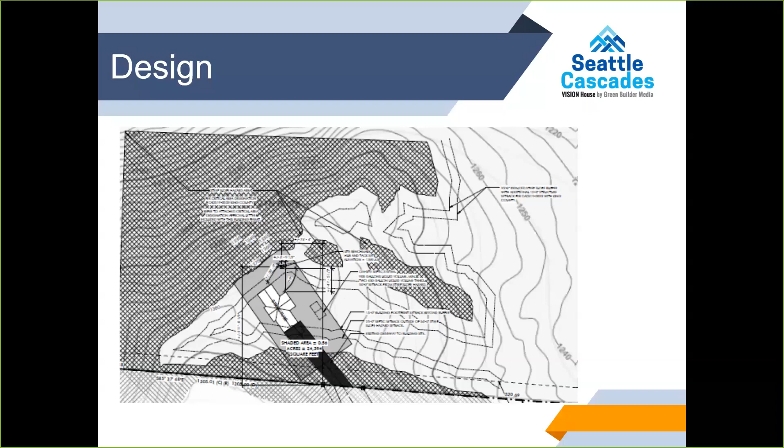Note that we also tried to keep anything downstream like septic and sewer connections simple. It's a septic connection, not a sewer, and it's down, so it's gravity fed. We're trying to keep this as simple as possible, with the least number of pumps and filters possible.

As we started talking about the challenge of the environment we were building in, we noted a few important things. Number one, drilling through all the stone on the property costs a lot of money per lineal foot. It had to be drilled to get water that may be there, and we didn't know how many hundreds of feet we'd need to go down.

We determined that, being site-specific and because we get so much rainwater there, we would have a large cistern that would provide all the potable water. As in any typical project these days, everyone is worried about low utility costs. We don't buy water, we get it from the sky. It's free, except for the pumps to run it and to build it.

Everyone is worried about energy, so we have a very highly insulated envelope with a SIPS roof, structural insulated panels. We have insulated concrete form walls, and insulation underneath all of the at-grade concrete slab, so we have little to no thermal bypass going on, making it a very highly insulated project.

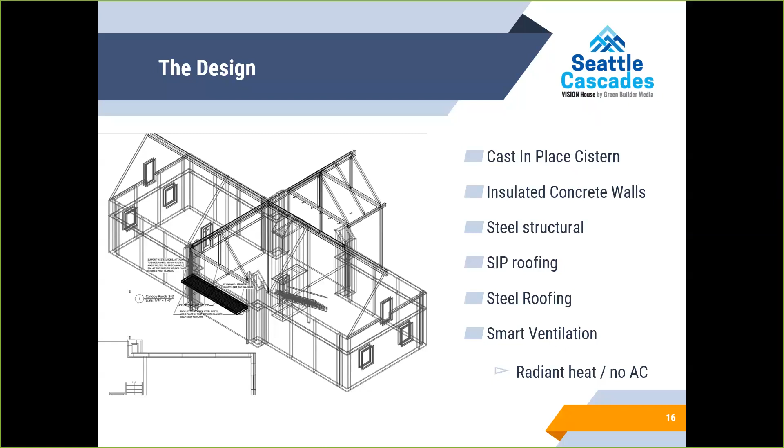And in general, because we're so highly insulated, we have a well-ventilated house, and we'll go into that more in future slides.

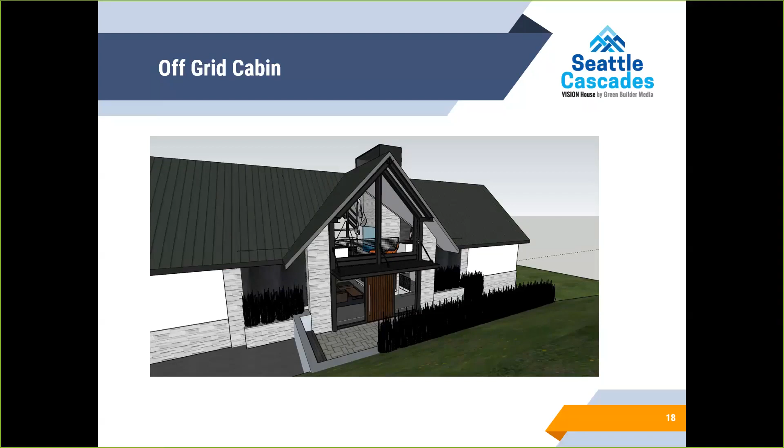So I'm going to describe the floor plans very quickly so we can all get a concept of how this design lays out. At the walk-out basement floor — this is the floor above the basement — in the basement we have a garage, a cistern, and all of our mechanical systems.

You can see from CR's design that he really loves to entertain in the kitchen and dining room area and likes to get big groups of people together. So the kitchen and dining room area doesn't have a whole lot of windows, because it's really about an intimate time to be together, entertain, and enjoy each other.

As we go up to the next level, these rooms are in the gables, so we have very steep pitched roofs in these areas. That's why closets and things of that nature are on the steep pitched side, so that in the middle, the bedroom has a nice high ridge, which allows heat to get away from a person and rise to that ridge line. You can see we basically have two master suites and a big open area in the middle, which we'll get to.

We start designing, as you can see in the earlier images, from simple SketchUp models. We move from those into a 3D design where we can have full conflict resolution for all the systems we're putting into the home, so that there's the least amount of conflicts or challenges during the building process.

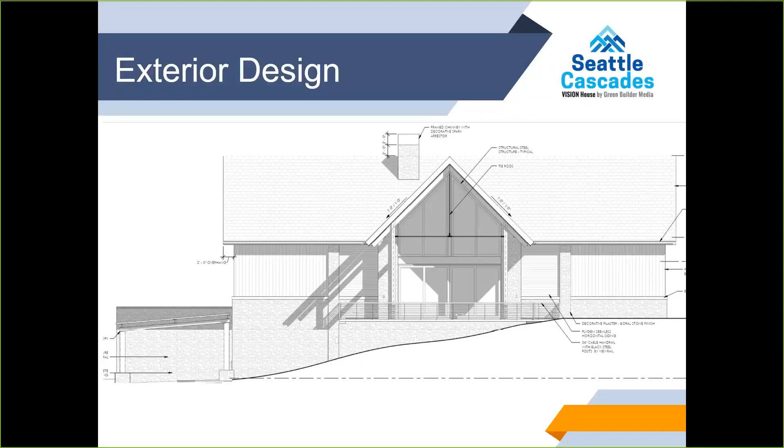This is the back porch, early on in the design. It doesn't show all the topography changes and those things, but you can see a mixture of stone, steel siding, steel roof, and a steel gable end with a lot of glass, capturing that amazing view that CR showed you earlier of his site.

This is as the design is pushing through time. When you saw where we started, here is more where we're ending up. You can see the back porch got a lot bigger and more covered, so there's more use of that indoor-outdoor space.

You can see we're showing some concrete form work. That's the mechanical space, underneath that deck is the actual mechanical space of the house. The grating, the louvered system in the corner of that deck, actually houses an atmospheric generator there, which we'll talk about in the future.

And you can see to the left there's the PV trellis parking area, which provides all the power for the home. Again, simple, modern cabin.

CR just integrated this piece to us recently, and CR loves to barbecue and get people together and hang out, so we decided to put a little dining pavilion a little ways away from the house where he can barbecue. The reason it's a ways away is to keep the barbecue grill smoke from traveling into the house, but being able to go to the side.

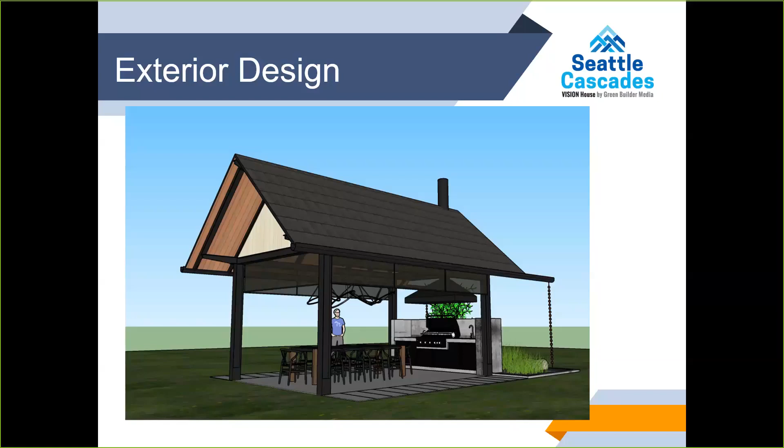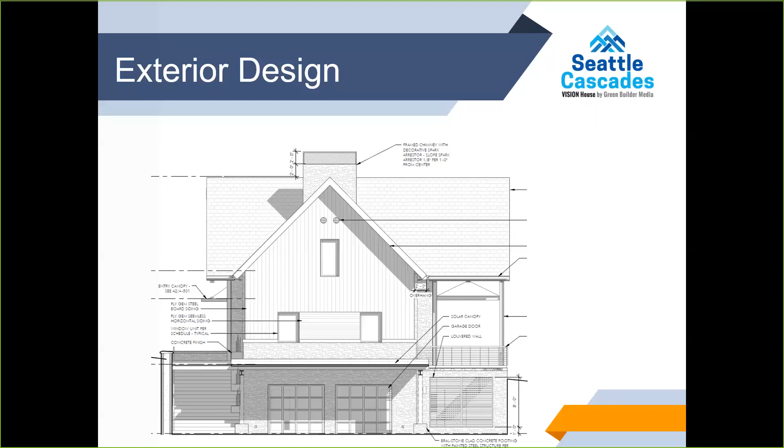You will also notice the floor plan is very rectilinear. Again, we're trying to keep it simple. We're working within the systems and the span of the systems, which is a Hambro flooring system with a concrete deck that really works to maximize the use of that product. And that's how we ended up with a lot of the widths, designs, and proportions of this house—how those systems are being used most efficiently.

Again, just a little original rendering of that same elevation, you know.

I will give Stace the out—one of the only arguments he's lost in this entire design process was me putting a remote laundry system in, which is me being a super pragmatic building scientist. A dryer sucks out so much of your conditioned air when it runs. I really argued to develop a space where I could put the laundry system outside of the conditioned envelope to reduce the negative impact of laundry. It's unconventional, but it's also super convenient, right?

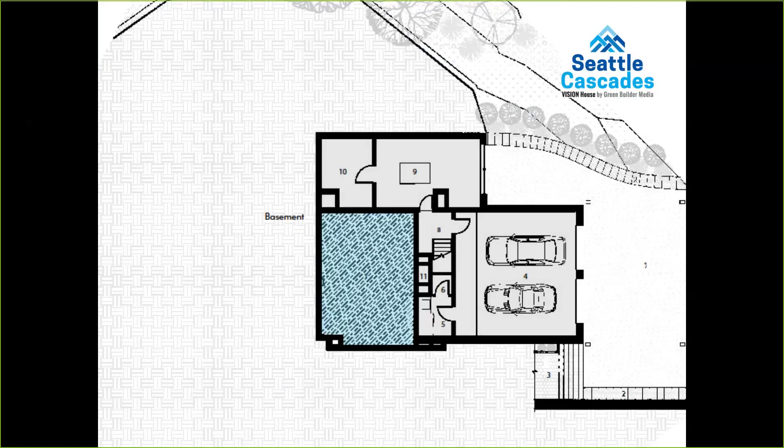So I wanted to tee up Stace a little on the interior as we go to some of the interior renderings, because one of the two design principles that was important to me as the person who's going to live in this home was: what was the home built around? In that climate and the way that I live, I wanted a heart to the house. Almost dead center in this home is this amazing 13-foot wide, 26-foot tall stone monolith with a fireplace set in it, to really act as the center to collect community, the center to start design, and the center of the aesthetics of the home.

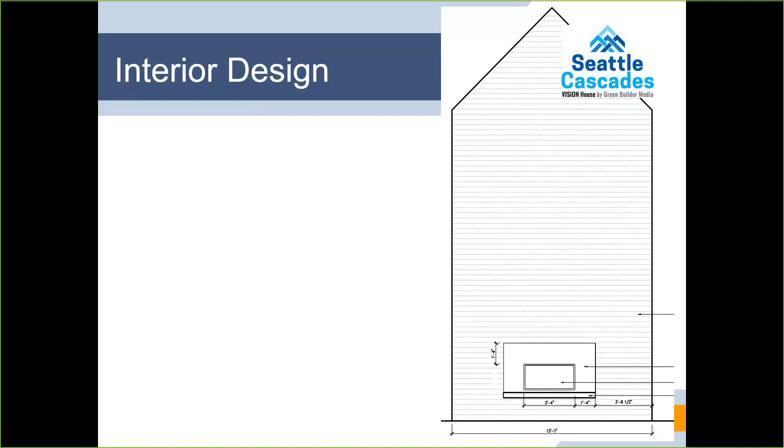And so as you kind of walk through the interior design, this is really based on my strong desire to create this big stone monolith as the centerpiece for the home and the heart of the home.

So as you can see, Stace had walked you through the floor plan, and before we get to the renderings, you can see the thing labeled as number 15 is that fireplace. As you come in, it's the big stone monolith to your right. As you're sitting there, it envelops your views on either side of nature, and it really does provide the center of the home around which all of the traffic swirls and the guests would turn, and the lifestyle of the home is largely based around that.

And the second piece was, whenever I've loved a cabin, I've loved lofts. I've always loved that rustic cabin with a loft up in the apex of the roof. It's just not something that you see in conventional design. But it's a feeling that I really love, that you go upstairs and you get nestled into the attic, and it feels to me warm and secure. And as a scientist, I love the origami of all those roof lines coming together.

It really did, those two factors—the large stone monolith and the master bedroom seated up in the attic—were really kind of the two big asks that I made of Stace as we came in and thought about the way this home was going to live and the way it's going to feel.

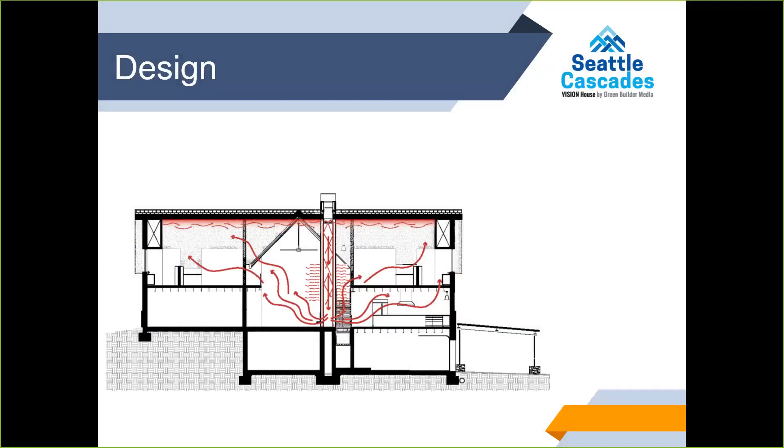Stace had mentioned this a bunch, but I wanted to put my building scientist spin on it. This house sits on top of a 700-foot grade change in basalt, a volcanic, very hard rock, so groundwater may be found somewhere 900 feet below this home by drilling through basalt, and that was financially unfeasible.

But it also afforded us the opportunity to rethink the way we think about what an off-grid zero-energy cabin could look like. Because Seattle gets 90 inches of annual rainfall, we were able to design this house around water capture, and I love the look of steel roofing.

So we reached out and found this new product from Boral, which is a stone-coated steel roofing. Design-wise it's super great. Energy efficiency-wise it acts as a cool roof, but also as a nice surface to collect all the water that hits the roof into downspouts that pre-filter and go into the cistern that's part of the foundation. Doing that, we exceed the water demand by almost 2 times an average family of 4, just from the water that hits that roof.

We should have a tremendous amount of opportunity to provide all the water for this house off that roof. And there's another system that enables us to take humidity out of the air and create distilled water to augment the water demand should it be necessary, with 35,000 gallons of storage capacity to both serve water needs and flex excess energy that could come off these solar panels in mild climates.

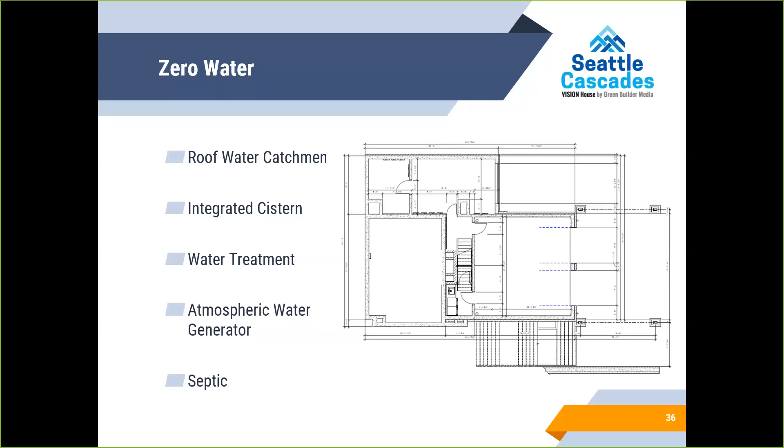The atmospheric generator is a very simple piece of equipment. It costs about $2,500 and works just like a heat pump. It allows CR, when needed, to make about 100 gallons of water a day. So it's a super simple system, easy to maintain, and gives everyone that feeling of security.

I'll take a little bit of this. Stace talked a lot about wanting to use thermal mass to increase comfort and leverage the climate. During the summer it's a very cool 60 degrees on this hill, but it'll heat up to the mid-80s during the day. By using thermal mass, we can ventilate the home, bring that cool air in at night, cool down that large thermal mass, which is the interstitial space of the masonry system in the middle of the house, and use that to maintain very cool temperatures during the day.

Without running an air conditioning system, it's the way homes worked before the invention of air conditioning. These shifts not only provide a new opportunity to reduce energy use and let us be off-grid more effectively, it's one of the largest design elements that's going to start impacting all of us going forward, because this load shift, or what they're now calling grid optimization, literally impacts the cost of producing energy for residential power use by $1 trillion.

There's a tremendous amount of research being done by the US EPA and the US Department of Energy, and policy being created, so we'll see code coming out through the IECC that requires designers and builders to start considering load factors, the way a home consumes energy at peak, and using strategies like thermal mass, ventilation, and controlled fenestration to really think about load management and shifting those peak loads off the utility demand curve.

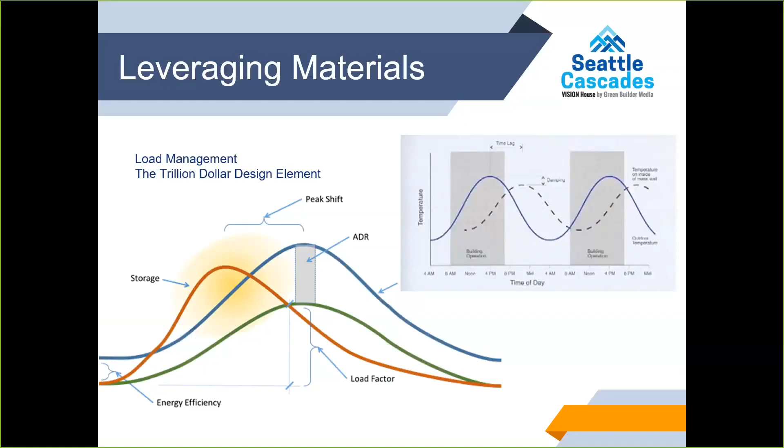As designers, all of us are going to be so involved in this in the future, it's not funny, trying to help all of our local jurisdictions understand how we all play a part in doing this. It's part of us as designers providing information to our owners and clients so they can make educated decisions.

Go ahead, CR. The other piece of not just being really efficient is enabling us to generate a project that demonstrates very smart zero energy. There is actually access to power, but we decided that because of the push to a low carbon energy source, and because of the push for homes to become zero energy in a lot of municipalities, we wanted to have the discipline to not tie into grid power.

And so this entire home is self-sustaining from water, and it's self-sustaining from power. We designed the PV system as an architectural feature, with rain shedding off the front of the garage that acts as a carport, and as an architectural feature to the tuck under garage.

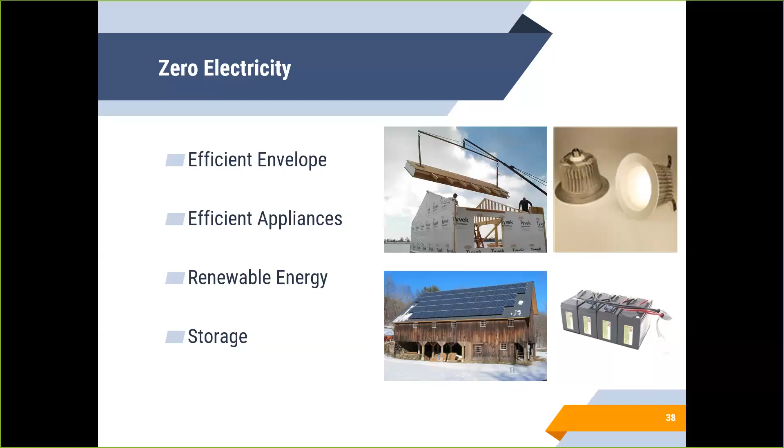But also we wanted to tie that energy in with a good, intelligently designed home. You know that lower left picture of a barn with solar? You can make any home, including a barn, zero energy by not thinking through the details. But by using SIP roofs, high thermal mass insulated concrete forms, efficient appliances, and storage, we can tie the entire home together to have a very low demand, a very flat energy curve, and demonstrate a project appropriate to tie into utilities to provide that load flattening, low demand residential structure in places where they either don't have sufficient roof space to tie into the grid, or they don't want to depend on batteries and want to use the utility to augment their power demands.

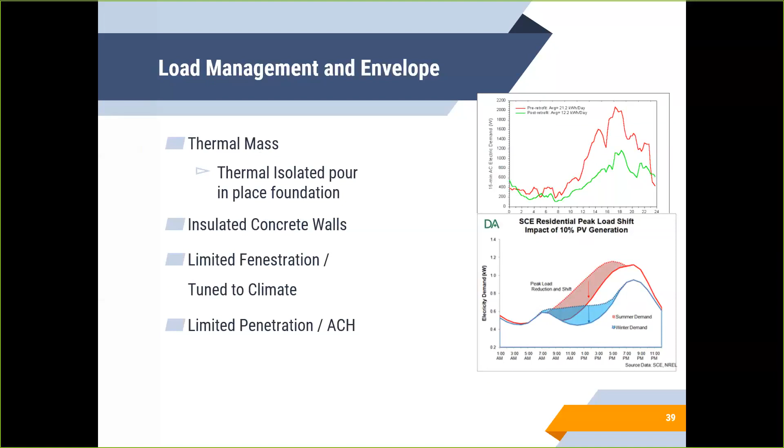And so all of this comes together in some very interesting ways to tie in the materials we're using for durability, for comfort, and for zero energy, to create a program that is very synergistic, that load shifts, uses smart controls, and ultimately takes all of the peaks out of a home. We'll be monitoring this for the next several years, circuit by circuit, and reporting it back through Green Builder Media and other partners in order to demonstrate a design standard that achieves these future goals of load optimization and grid optimization.

Stace, any thoughts on this before we move along? I think we should move along just because we're going to run out of time, and I want to respond on one of these next comments, on the next slides.

So as we kind of wrap up these thoughts, there is a tremendous amount of embedded technology, right? There's a solar system, a battery system, a radiant floor system, a ventilation system that can do both health and passive cooling. There's a condensing system to create water, a cistern you need to monitor to know how much potable water you have, pumps to run both the radiant flooring system and the cistern system, and the hot water system.

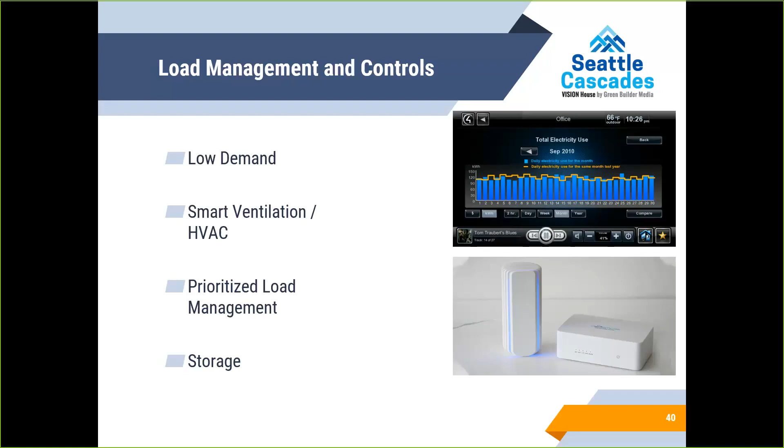There's the lighting system. And all of that could be complex and easy as a building scientist to run, but not something I would build and provide to an average 36-year-old mom and expect her to be happy with the control system. So one of the big opportunities we've had is to partner with companies like Control4 to integrate all of this building science and all these algorithms and complexity into a system that is super easy for an average consumer to use through a single dashboard.

This is what I'm absolutely most excited about in this project. I've done lots of vision projects over the years across the country with Green Builder magazine, but you are the first owner who understands that collecting this data matters. We understand as building scientists how things work, but we're going to be collecting real empirical data, which I'm so excited about. We're going to help develop a dashboard that makes this process easy for anyone who can run a smartphone, able to control and understand what's going on in their own house. I think that is absolutely the future, and we need it as soon as we can get it.

So that we can all understand how we, as individual homeowners, can plug in to overall goals developed either by our local governments or our own environmental goals where we want to be a part. So, super excited about this.

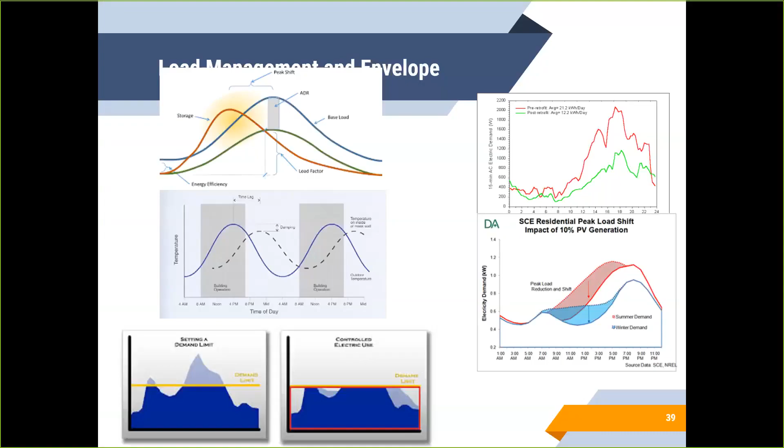I can talk about the ventilation before getting to 14. We are using one of the new Panasonic systems rolled out into the marketplace called Cosmos. They've been beta testing it for about a year, and the Cosmos system is a balanced ventilation system. It combines kitchen and bathroom exhausts together with fresh air intakes called Panasonic Freshes, which we're using for supercooling during the summer, or bringing in the ASHRAE required amount of fresh air into the home because we're making such a tight envelope.

This type of system actually combines all of the exhausts together, so you don't see them coming out the kitchen exhaust in between the windows, because we're taking it up through the wall and out the eave just so we don't have to see that exhaust.

But again, that exhaust system is all interwoven together as a balanced system, extracting air and bringing fresh air in as needed to meet ASHRAE, and it's going to be tied into the dashboard that CR and I were talking about earlier, so you can see how it's functioning.

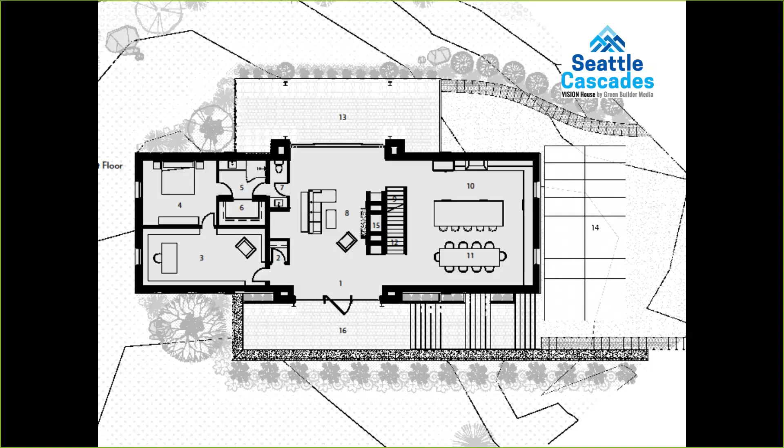Since we're almost out of time, I want to give you one more question and then I have a comment. Someone's asking about the exterior: why did you choose stone-coated steel roofing for water collection? I know there are differing opinions on which roofing materials produce the best quality water, and I'm wondering what your thoughts are. Yeah, so I first started with steel because in a rainy environment, there's something really beautiful about the sound of rain on a steel roof.

And then as we evolved the design, it was clear we'd have an awful lot of smooth steel surfaces in the board and batten walls above the stone, so creating some texture was an excellent opportunity. When we ran into this Boral stone-coated steel, as a building scientist I noted that it stood off the roof, meaning there's an inherent air vent underneath it. An inherent air vent means you put the roof in shade and air can move up between the steel and the underlayment of the roof to cool it, so you don't have super high heat gain in summer.

Because we're just using passive cooling, it enabled me to do three great things: it enabled me to have the noise, it enabled me to have an aesthetically appealing surface that blended well with the smooth board and batten steel below it, and it enabled really good energy efficiency, because the way that steel piece is designed, it doesn't directly lay on the roof and doesn't directly transmit radiant energy into the system.